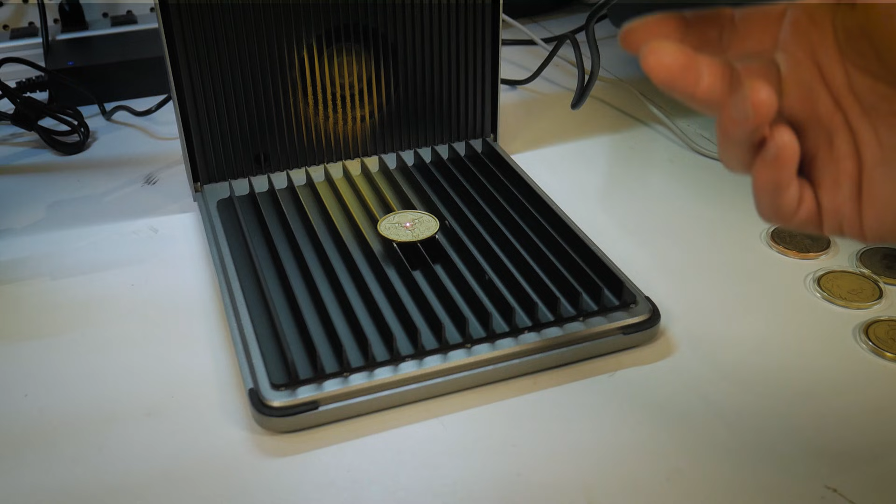Before we get right into the examples, I want to just briefly reference a problem that you may have noticed in the previous video that I did with the xTool F1 Ultra with the deep embossing of brass coins. The coins themselves looked amazing and there were no issues with the performance of this machine, but I want to just draw your attention to one of the inherent issues with deep embossing of brass coins, and that is the byproduct of very fine metal dust.

This metal dust will collect pretty much everywhere. Obviously, it's going to get sucked into the exhaust fan, and anything that doesn't go through your exhaust system that goes airborne could settle on all of your work surfaces, or even worse, inside of your lungs. During and after the making of that video, I prototyped a few different solutions for at least addressing the issue of the brass dust clogging the exhaust fan at the back of the F1 Ultra. But I didn't have a whole lot of success with this approach.

Ultimately, some of the brass dust still made it past the filter, and the stuff that was captured by the filter clogged those small pre-filters almost immediately. And those small pre-filters also didn't address the issue of dust escaping elsewhere into the room or even settling on the lens. And if you've ever done brass coin embossing on an xTool machine or any other machine for that matter, and all of those fine brass dust particles are getting sucked into your fume filtration system, you'll know that even with a very large pre-filter like the one on this filtration system, it will very quickly get fouled. This result here is from a single brass coin.

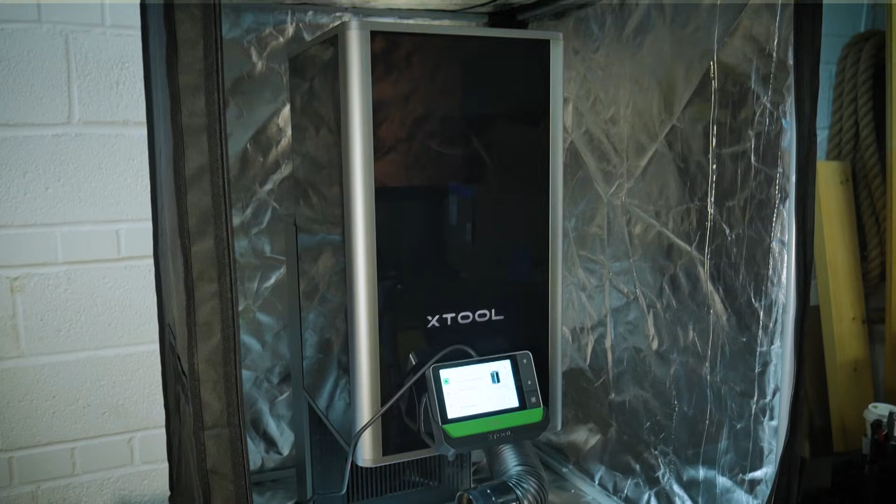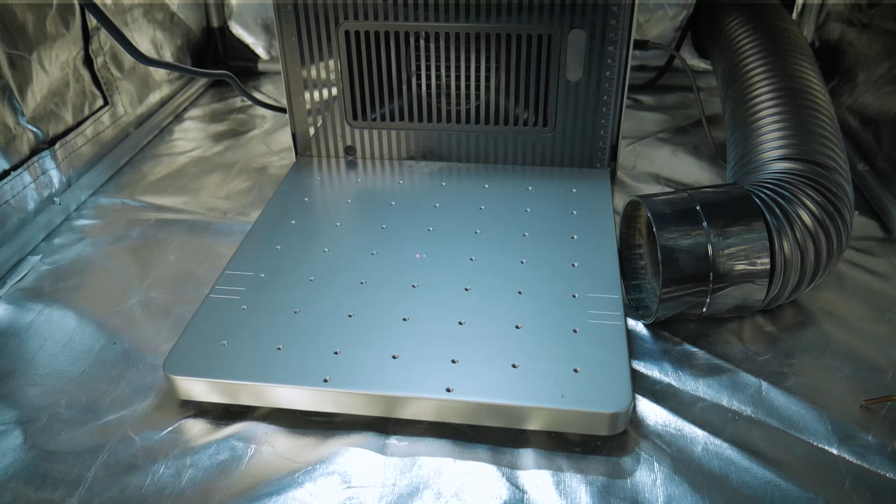So in this video, I do have some new solutions as well as some new suggestions on how to address some of these things. For example, with the F1 Ultra at that time, to get rid of the dust that's escaping the machine and settling on work surfaces, I put the entire F1 Ultra and now the F2 Ultra inside of one of these 3D printing tents. I'll link to this tent in the video description down below, but both of these machines fit nicely inside. You can zip the front cover shut, and there's also a hole at the back where you can route your exhaust hose. And now there's more of a slightly enclosed area for brass dust to settle.

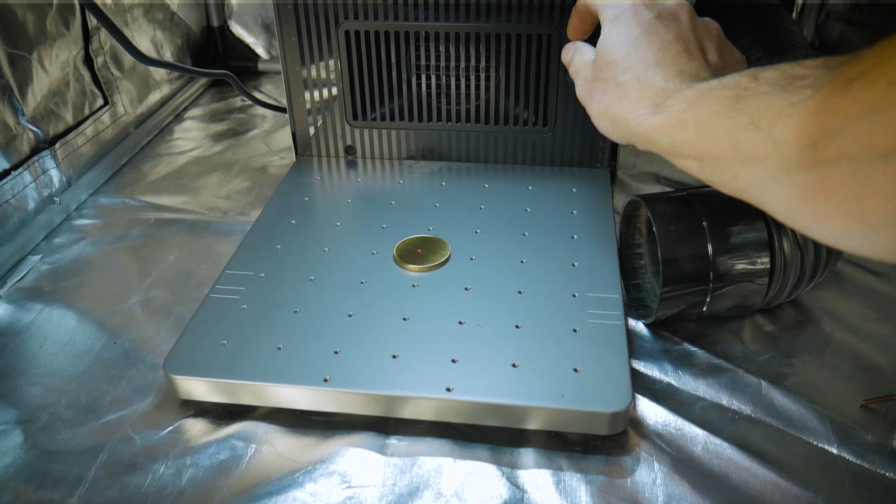And now with the F2 Ultra, you can see with the exhaust fan at the back, if I were to process this coin, we would obviously have the same problem as with the F1 Ultra. And to make matters worse, some of the accessory ports are now right at the back near the fan. Now there is this cover, and the F2 Ultra fan can be removed and can be washed, but ultimately I still think that if we can avoid getting brass dust caught up in all of this stuff, it's the best case scenario.

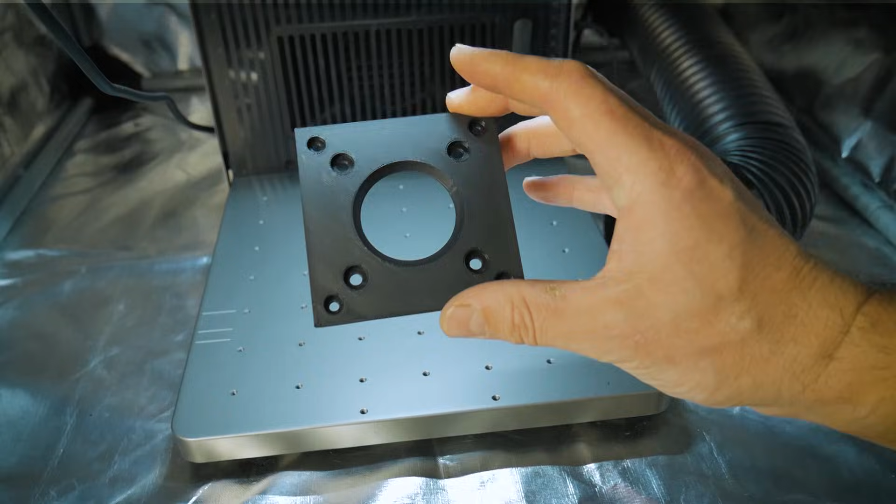And so what I've seen people do with open frame MOPA lasers is to just put an exhaust pipe beside the coin, and it will suck up at least some of the brass dust. This approach would bypass the dust getting sucked into the exhaust fan at the back and perhaps ruining those bearings, or at least having you take the machine apart and clean it. And this gave me an idea to come up with a system where we could more efficiently capture and control all of that brass dust right at the source.

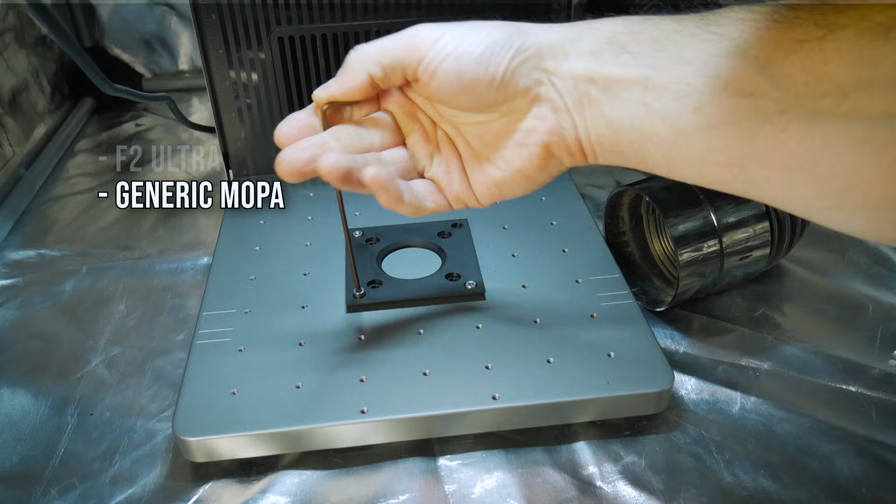So first, it starts with this fixture, and you can see right in the middle there's a hole. It's sized perfectly for a 40mm brass challenge coin. The fixture attaches to the F1 F2 Ultra base plate using some M4x10 socket head cap screws, and there are additional M5 holes if you wanted to use this on a generic MOPA laser, where I believe most of them have a hole spacing on the base plate with M5 threaded holes that are 25mm apart on center.

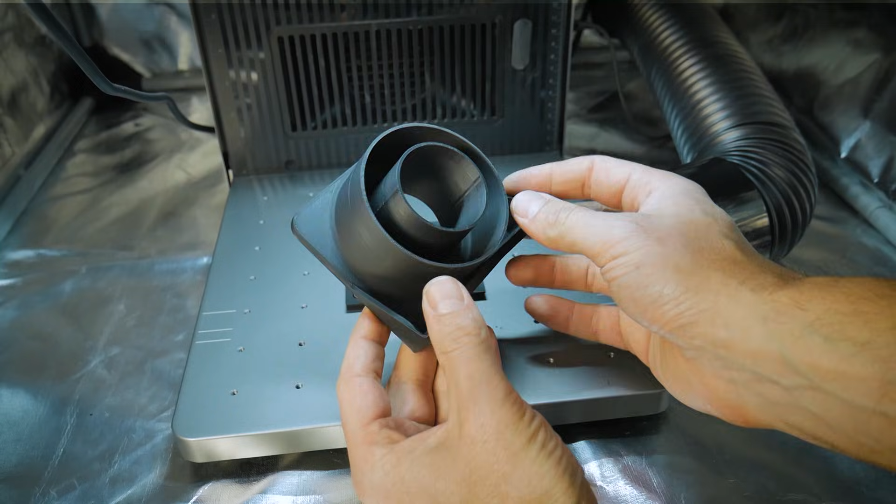So it's compatible with both. Now to the side of the fixture, we're going to have this exhaust port, and you can see there are two sizes. The larger of the two sizes will fit the black xTool exhaust hose, and it will just press fit on there. And there's a smaller port size that will fit a generic flexible 2-inch hose, and we'll talk about that a little bit more later.

This part also has a pair of mounting holes that use the exact same M4x10 socket head cap screws that work with the F1 and F2 Ultra base plates. Now for those, you will need one of these Allen keys with a ball end.

Now just like the fixture, there are 2 additional holes on this same piece that again would line up perfectly with a generic MOPA fiber laser base plate with those 25mm on-center M5 threaded holes. So the intent behind this kit is that it would be compatible with the F1, F2 Ultra, as well as a generic MOPA fiber laser.

So now once we've got this piece installed, I can take the black xTool exhaust hose and I can press it over top of that exhaust port. Then I can take my brass coin and I can place it in the fixture. Now to capture all of the brass dust, there is going to be this box that slips over top of everything. And I'm showing you the final 3D model right here, because in this video, you're going to see several different revisions of it, starting with one of the earliest revisions. And as the video goes on, we'll work through some of the natural design progressions of that box.

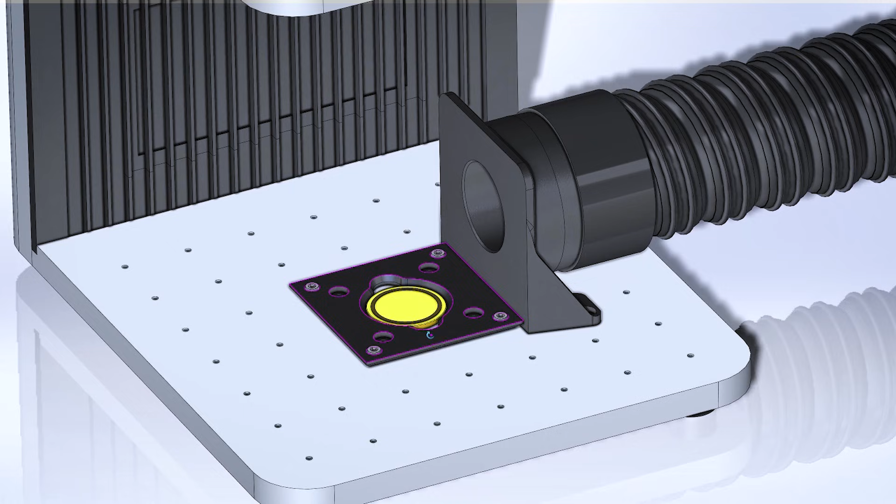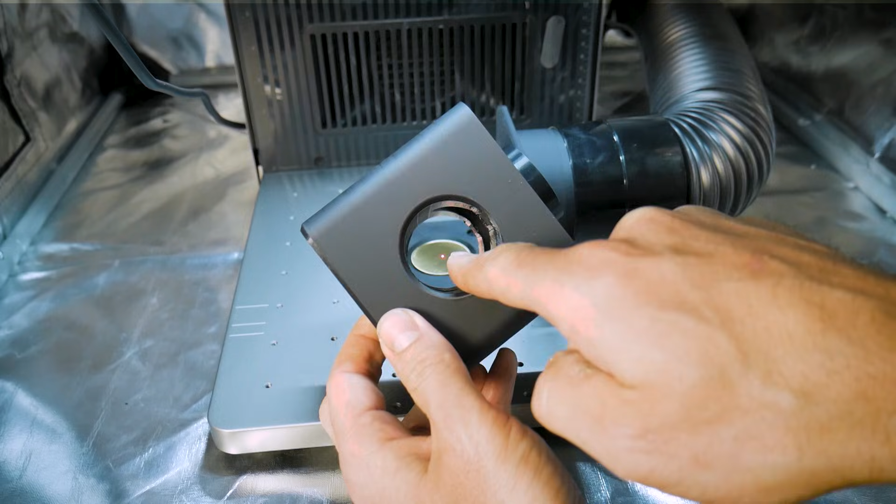But essentially it goes over top of the brass coin, and it allows the laser to pass through and obviously still process the coin, but will not or should not allow any of the brass dust to escape. All of it should go through that exhaust port, and this should solve many of our problems. So none of the brass dust should escape this system and collect at the rear exhaust fan or on the lens of our machine, and hopefully none of it should also go airborne. So we'll start there, and as the video goes on, we'll also address some of the other issues, such as the clogging of the pre-filters that I showed you a moment ago.

So right now we're going to go into xTool Creative Space and set up our first job with the F2 Ultra. I have embossment selected in the processing type, and then I've gone ahead and focused the laser on the top surface of the 40mm brass coin. Now I've imported my first graphic, and with embossments, you are going to need to use a depth map.

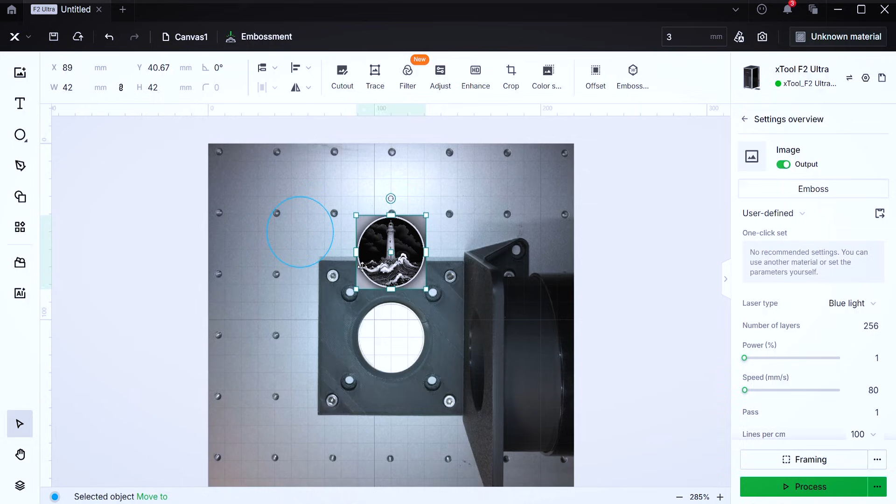Now, this is outside of the scope of this video. I did cover this in depth, no pun intended, in my xTool F1 video. So if you guys want to learn about that, please check out my F1 Ultra embossing video. It will teach you what a depth map is, how to generate them with various methods, and even how to modify them. So I'll put links to that in the video description down below.

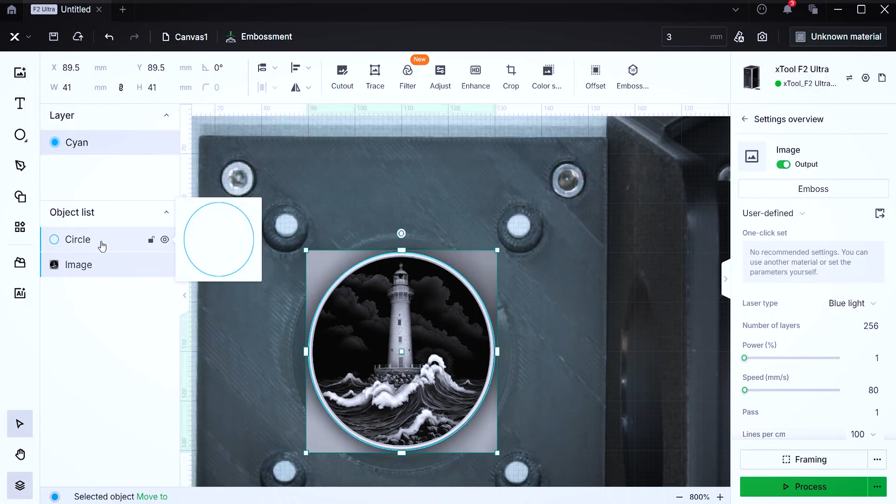And so while I was talking about that, essentially all I've done right now in xTool Creative Space is resize the depth map graphic to something around 40mm. I've created a vector circle, which is 40mm, and now I'm overlaying the two, and I'm adjusting the size of the graphic to fit inside of that circle such that I can use the vector circle and I can select the image together in the object list, right click, and then create mask. And what that's going to do is use the circle to crop out everything outside of the circle. So all I'm left with is this perfect circular graphic to fit inside of the 40mm coin.

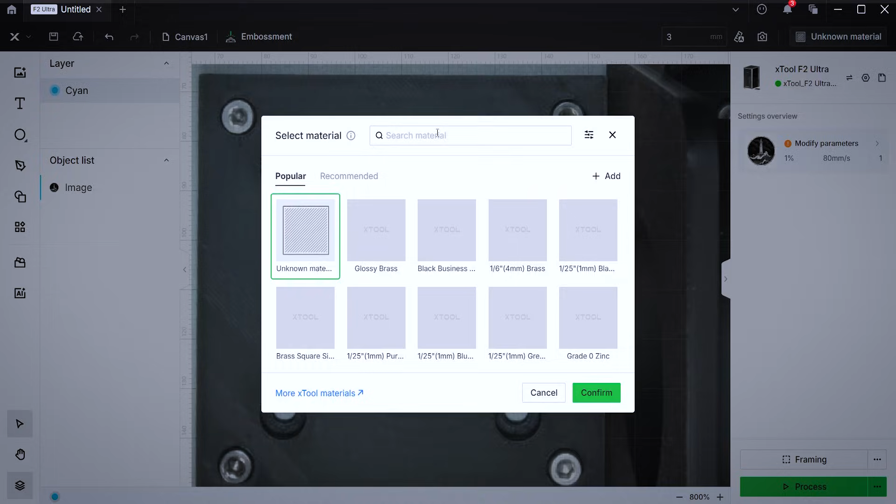Now in xTool Creative Space, we have to set the material type. So I'm clicking in the top right hand corner, and I'm going to go to more xTool materials, and inside of their now what's called Atomm library, we can go ahead and search for a material type such as metal and narrow it down by a search term like brass, or we can just scroll through the whole thing and eventually find the 40mm brass challenge coin settings. They do have other presets in there for other types of brass, but when you're doing embossing, you really want to look for these blank commemorative coins, and then you'll see here that it already has the F2 Ultra selected.

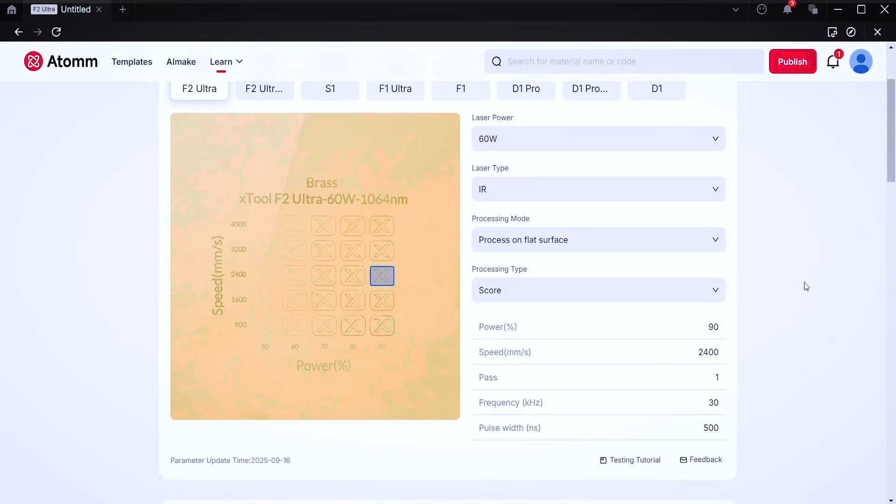The laser type is the IR laser, and if you click on embossment, it's going to give you all of the presets, but you don't have to remember any of those. You can just add those to xTool Creative Space, but then you still have to click back up in the top because now it's in your favorites list, and then you can just select that. However, what that will do is reset the thickness. So you can see that it's gone back from 4mm to 3mm.

So I'm going to use the buttons on the front of the F2 Ultra to refocus the lens onto the top of the surface. And by refocusing the laser, it's triggered another screen capture. But you can see when I select the graphic, it already knows that I want to do the embossing. So all of the preset settings have come up. And if you click on the advanced, there is an option to also do a cleanup pass. And for this first example, I'm just going to leave that off, and I'm not going to touch any of these settings. We'll use all of the presets directly from xTool.

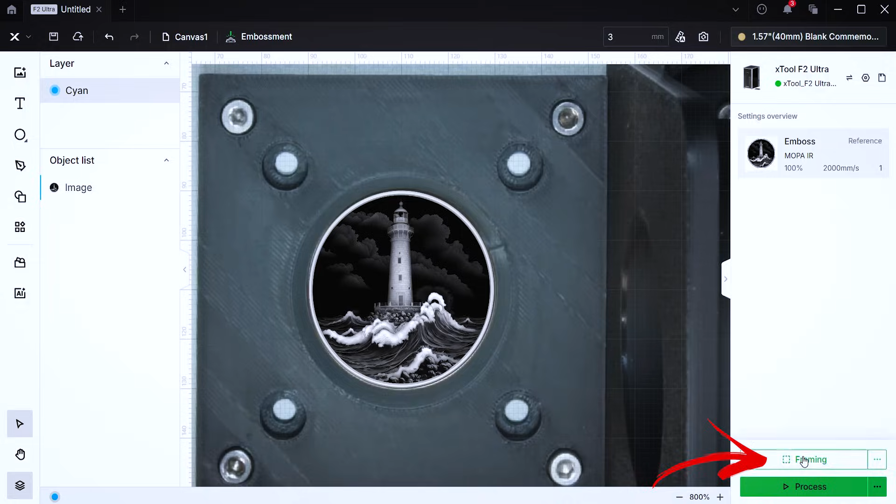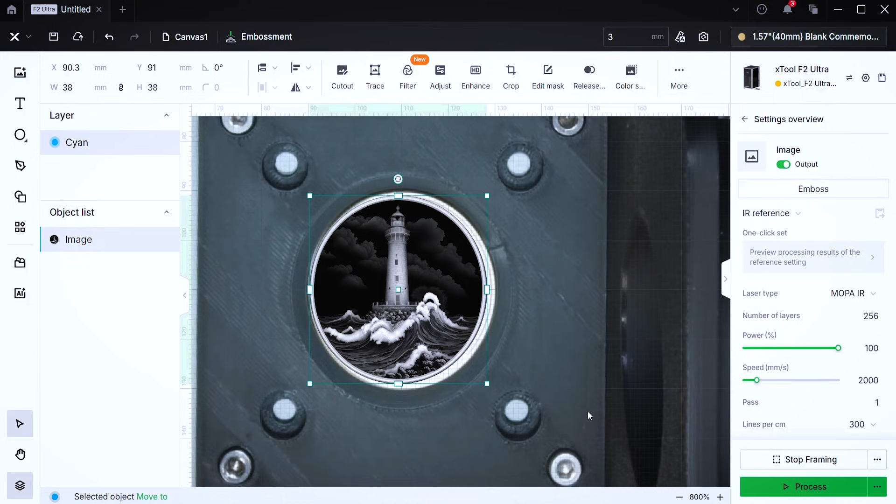Now, even though our graphic is perfectly centered and it looks like it lines up very nicely with the screen snapshot, what we want to do is frame our graphic. And we're going to use the outline style framing. We'll get a nice circle. And back in xTool Creative Space, if the outline for your framing isn't lining up right on center with your coin, you can just select that graphic and you can move it around using the arrow keys on your keyboard. You can do this while the framing is going on, and that will dynamically change the location of that blue laser framing that you see on the coin. And when you're happy with the final position, then you can just click on Stop Framing.

At which point you're now ready to just click on the green processing button, and you'll see a preview with a time estimate in the bottom left-hand corner. So for this graphic, we're looking at an hour and a half. I have my exhaust hose with that dust box hooked up to the older style xTool smoke and fume purifier. And the reason that I'm using the older one instead of the AP2, which I also own, is that I don't have anything set up right now for pre-filtration.

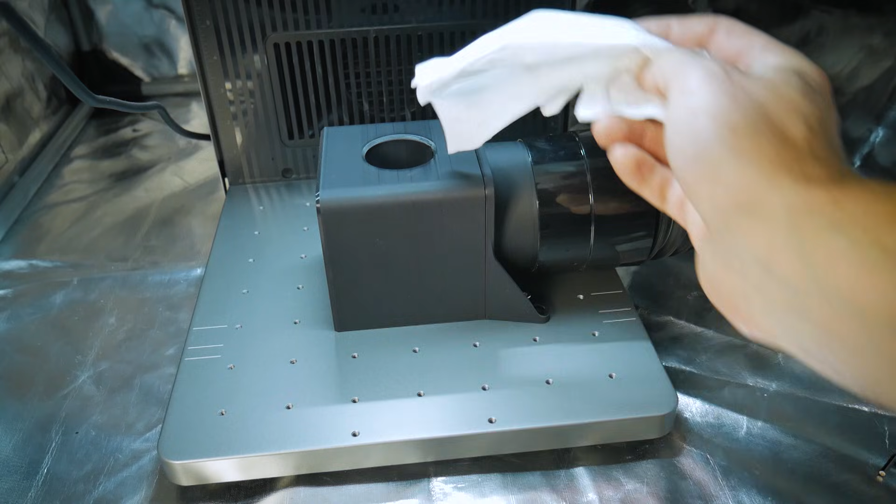I've cranked that fan up to the max setting, and you can see through the side hole and the top hole of the dust box that I've got a great amount of suction. Even if I were to slowly pull the box away a few millimeters, the suction is enough to pull it back in place. So with the box properly seated, we can now press the green button on the controller to start the embossing process.

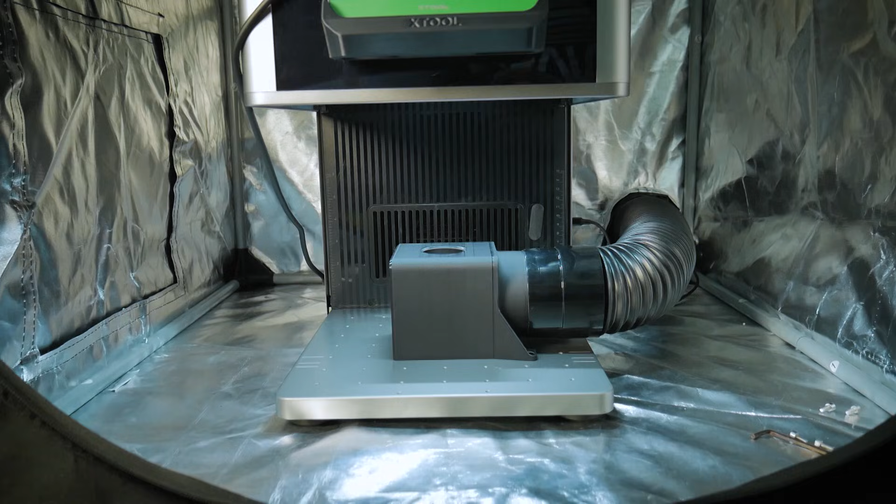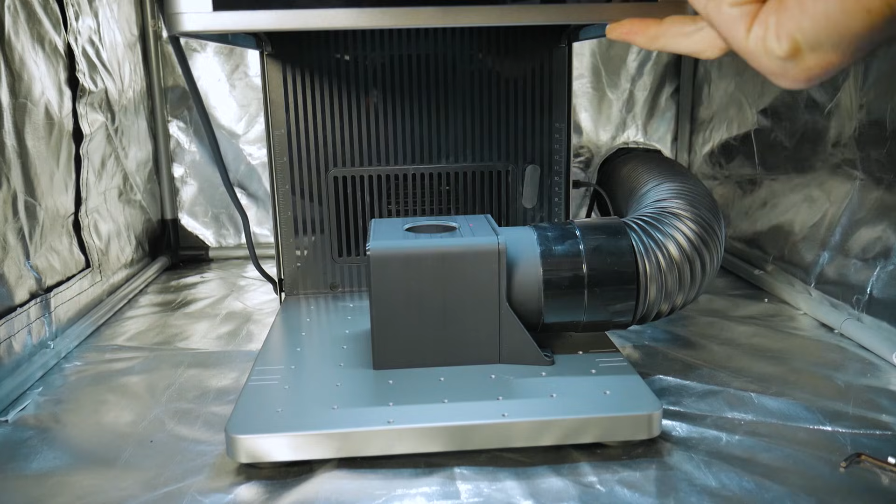Now, one thing you may also notice here is that the lid will not be able to fully shut as the hose is sticking out the side, so we can lower it most of the way down. The laser will be passing through that hole in the top of the box, striking the coin and processing it. Any reflections should not be able to come out and hit you in the eyes. You can also close the cover on the tent if you have one. But of course, without your lid fully shut, you should exercise the absolute maximum caution and make sure that you or anyone else in the room is wearing laser safety glasses.

Now, unfortunately, this dust box doesn't make for very exciting video footage because everything is happening inside of that opaque box and I can't film through it. And you'll see here that all of the dust was successfully contained. However, not all of it actually got sucked through the exhaust hose. Some of it was settled on top of the fixture. But the good news is that it did its primary job of protecting the fan at the back.

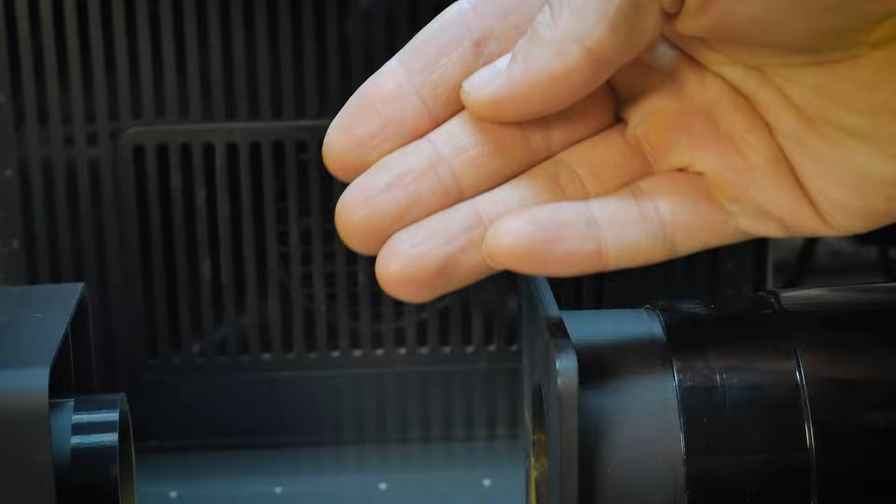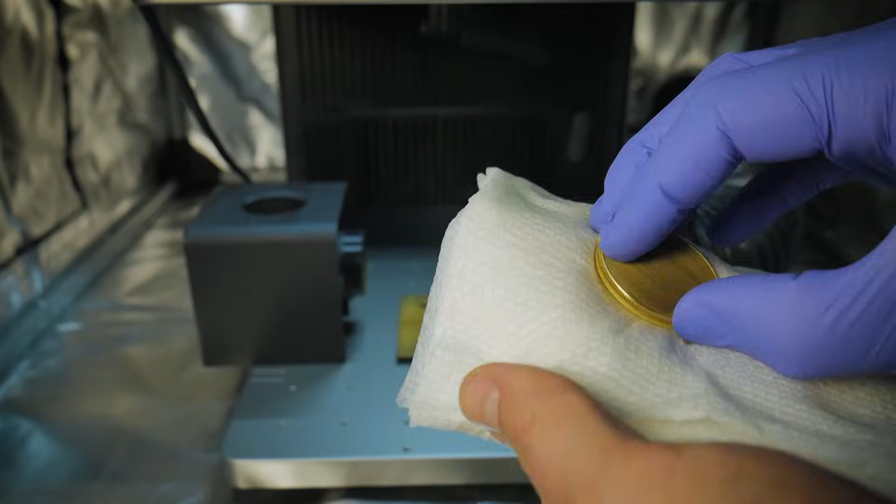Nothing seemed to escape that box, and considering the fan at the back just automatically comes on, it's still creating some amount of suction. So logically, if anything did escape, you'd think that some of it would settle on that fan grill, and nothing appears to be sticking to that. So that's a great sign. Now, removing the coin, the embossing looks very good. This particular coin here was one of the sample materials that came with my F2 Ultra. So this is an xTool Select material, and it appears to be of very good quality and solid brass. And that's very important.

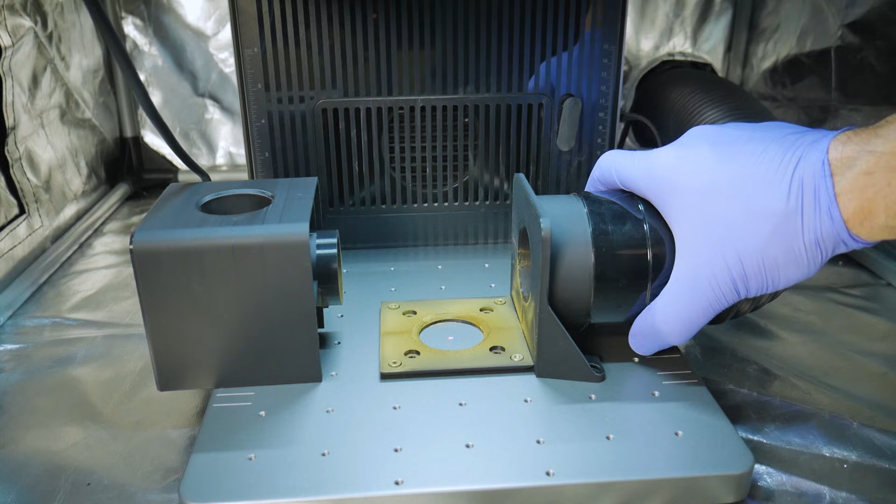In the F1 Ultra video that I told you guys you should go watch, you'll see in that video, and we'll touch on this a little bit later, that there are materials out there, cheap ones that you can buy from Amazon or AliExpress, that may not be pure solid brass. And those plated coins might contain steel or other materials that you will not be able to effectively work with, so you're going to want to avoid those.

Now, removing that exhaust hose, you can see inside that it is absolutely lined with brass, and that was a pretty new hose that I had not previously run any brass coins with. So you can imagine down at the filtration end what it's going to look like. Removing the cover to access the filter of the older style xTool purifier, the result is more or less what I had expected, and the pre-filter is completely blocked.

And during that embossing process, I noticed that this did have a negative impact on the amount of suction that the filtration system could produce. And it turns out that's mostly why when I had removed the dust box from over the coin, you saw a lot of brass material still left over. So I went ahead and cleaned the pre-filter just by vacuuming it with a shop vac. And then I'm going to reset our workspace here and just take a damp cloth and remove a lot of this brass dust from on top of the fixture.

And so even in this case where the filtration system was partially blocked and the suction was partially lost, and then we had some brass dust in there, because it is all contained inside of the dust box, it makes things very easy and manageable to clean. At this point, I decided to move on to a different strategy in trying to capture that brass dust before it made its way to the filter system.

And if you guys are familiar with woodworking, you guys have probably seen these Cyclone dust collection systems. This one is a mini version. It has two ports, one at the top and one at the side. The sticker shows the one at the top will go to your vacuum source, and the port at the side will go to the output port of our brass dust box. I'm using some very generic 2-inch inner diameter flexible hose, and it attaches to the Cyclone dust collector as well as the brass dust collection system with hose clamps.

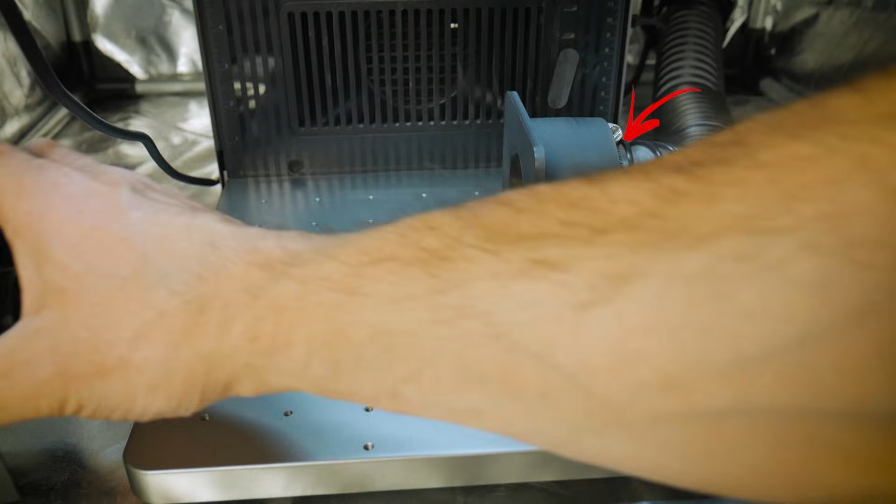I'm going to give this one a try and see how well it collects the brass dust and if it's going to protect our pre-filter from getting clogged up.

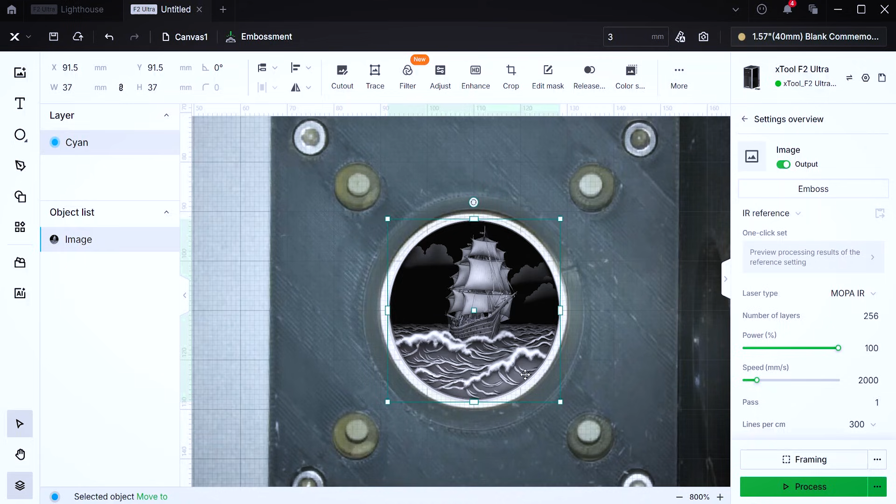Now I'm ready to emboss this design, and I'm going to use all of the standard xTool settings for the brass coins. However, I will enable the cleanup pass. Now we can press the green processing button and it will take us to the preview screen, where again we can find that this coin will also take an hour and a half. And I should mention that this is nearly twice as fast as what I had experienced previously with the xTool F1 Ultra. With the brass dust box in place, there's not much to see during this process, and we'll just get right to the point with the final result.

And again, a very nice looking coin. The F2 Ultra combined with these very nicely designed depth maps are producing very good results with some amazing details, and the depth of the embossing itself is quite deep.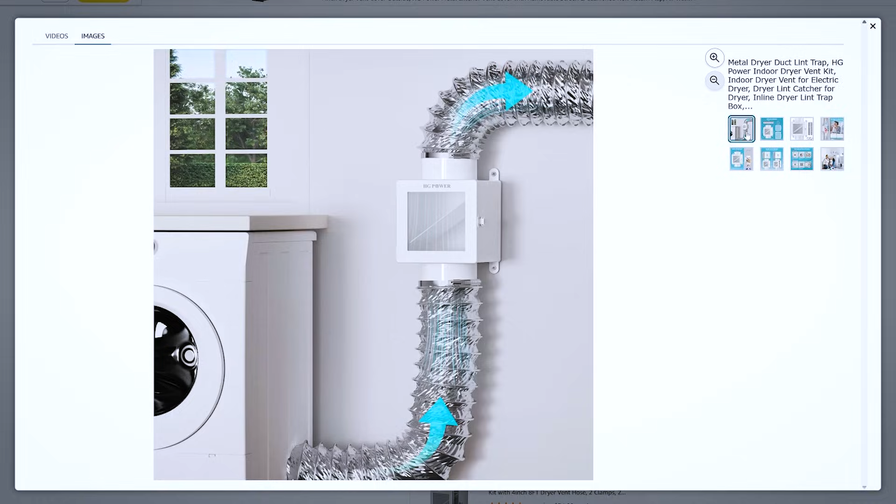However, it may be the case that you don't have this exact fume extractor, in which case you can look for some kind of inline filter solution, like a filter box or other inline filter component, where you can very easily swap in and out these paper towels. I'll put some links in the description to components I think will work, and by doing it this way, it won't matter what kind of vacuum source you have. You'll just need to splice this solution into the hose between your vacuum source and the dust box.

So we'll go ahead and try this with our next example, and for this I've got some new brass coins. These ones have a polished ring accent, and I found them on Amazon.

Back in xTool Creative Space, we're going to do a similar process where we take our depth map design and I'm going to crop some of it using a vector circle. Since these coins have a polished ring, and I want to retain that because I think it's going to look pretty cool, I'm going to crop off a little more than usual, and I'm going to shrink the whole design down so it fits inside of the polished ring.

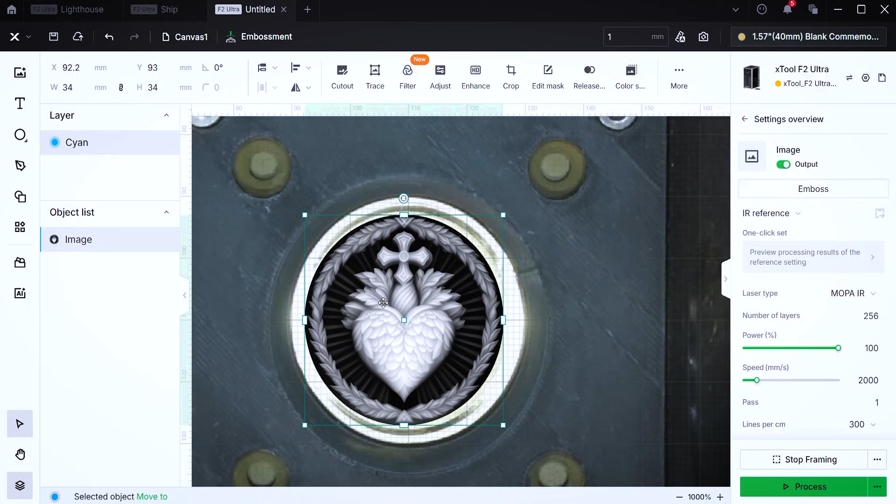To ensure it fits inside of that ring, I'll be using the framing feature. You're going to want to make sure that you've got your framing set to outline, so it will be a circle instead of a square. Once I've confirmed it's sized appropriately and positioned to fall directly within that polished ring, I'm going to go ahead and process it.

As always, I'll be using all of the default settings within xTool Creative Space for these 40mm commemorative coins. And just like all the other examples I've shown you, I'll slip that brass dust box on to prevent any of the brass dust from going all over the place.

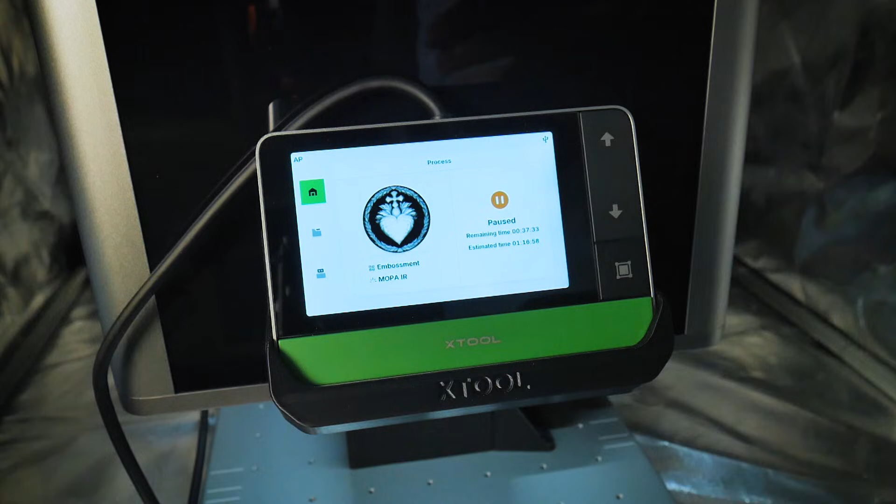But this time, halfway through the job, I'm going to pause it and change out those paper towel pre-filters I showed you earlier. This will ensure that during the entire 1 hour and 15-minute job, I have a nice amount of suction.

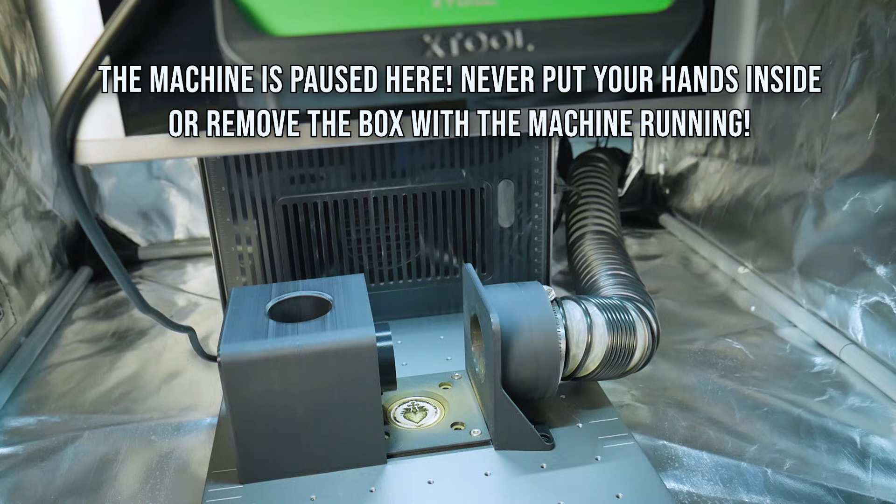While the machine is paused, I'm going to open up the dust box and take a quick peek inside to get a sense of whether there's a large amount of dust built up to this point. You can see this is a pretty good amount of time to change the paper towel pre-filters, and that will give us a good reference to compare to at the end of the job, which will take about another 40 minutes.

Moving over to the smoke and fume extractor, you can see that the single layer of paper towel pre-filter has been completely used up. So if you guys are going to use this paper towel pre-filtering trick, I would highly recommend that you change out your layer of paper towel around 30 to 40 minutes of processing time.

I'll quickly swap in a new fresh layer of paper towel and put the lid back on the smoke and fume extractor. The job can be resumed simply by clicking on the green button on the front of the controller of the F2 Ultra, and at the end of it, this here is the result. You can see it looks a little bit odd.

There are definitely some sections here of the coin that look underprocessed, and I thought that perhaps I had done something wrong in the settings. I went back and double checked those, and everything looked normal.

Next, I started to question whether or not pausing the job in the middle could be the culprit, but I'd actually done this in the past with other coins, and it had never been an issue for me. In that moment, I ended up just chalking it up as a one-off and figured I'd try to process some more coins.

But later on, after trying more of these coins, it seems like it was actually a material issue. In my F1 Ultra video, I had sourced some cheap coins off of Amazon that turned out to contain some amount of iron or steel, and it was obvious because they were magnetic.

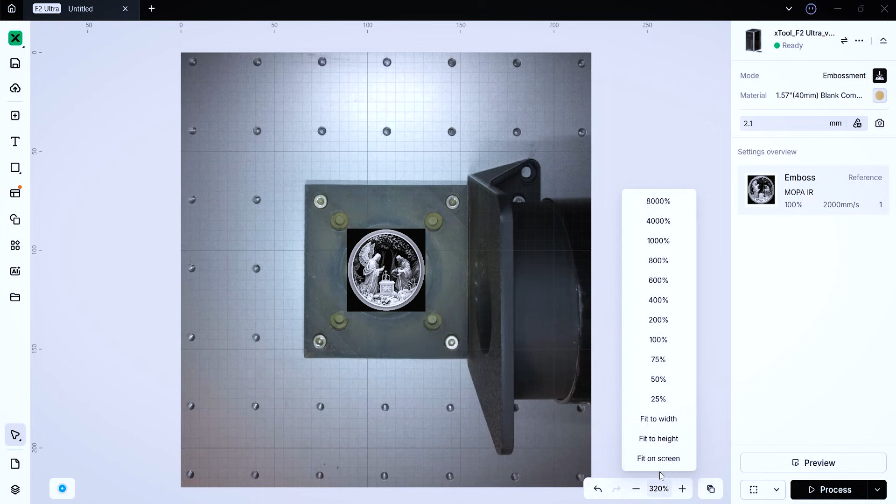On the right hand side you can see the focusing height, and we'll go ahead and use that along with the buttons on the front of the xTool F2 Ultra controller to set our focus to the top of the material and then get our screenshot.

Now with the graphics selected, we can click the edit button in the top right hand corner, and a bunch of editing tools will pop up on the left hand side. We can click on cutout, then I'll select manual cutout, and from there we can use the magic wand to erase the black background.

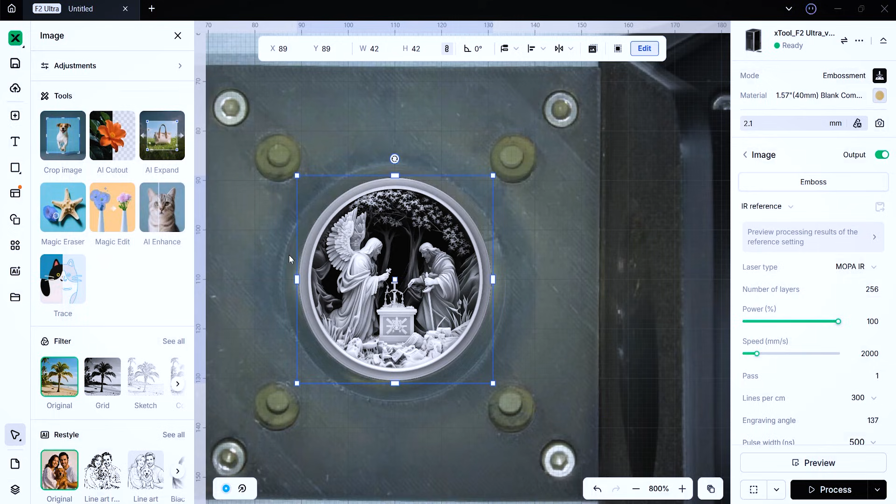Alternatively, we can still use the same method that we had done in the past by drawing a vector circle and then using that circle to crop some of the image. For this example, I'm going to be using both methods just to show you where to find these buttons inside of xTool Studio.

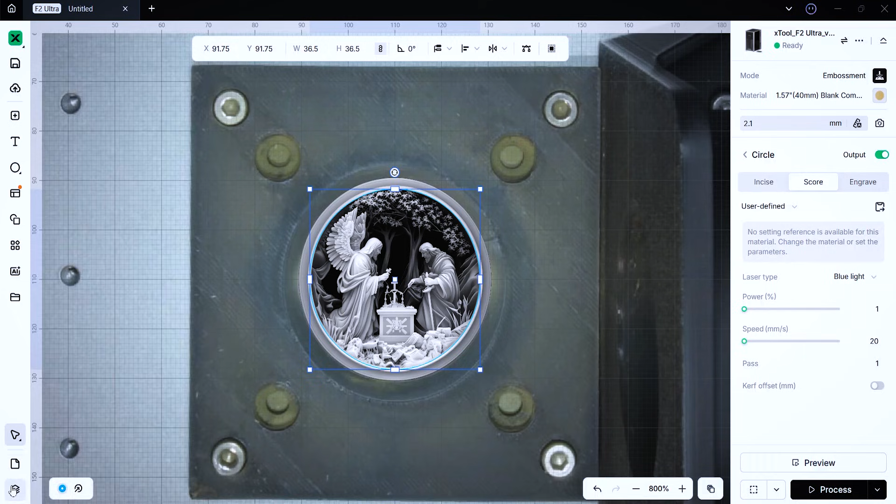So I used the cutout with the magic wand to remove the black background, and now you can see I've used the vector circle that I've drawn in, and I'm just going to resize it, and then I'm going to center it. I'm going to be using this vector circle to cut out the white rim around this entire image.

Just the same way we would have done it in xTool Creative Space, I've got the vector circle and the graphic selected, and in the object list, I'll right click on those both selected at the same time, and I'll create a mask.

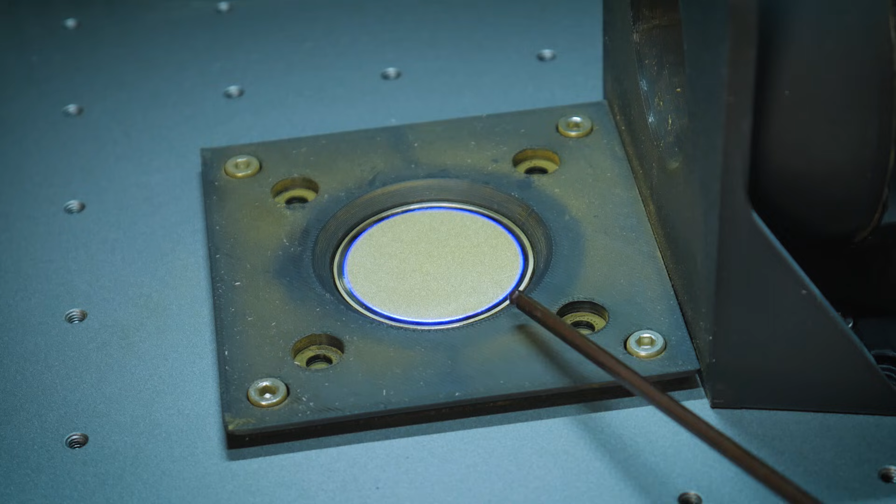That will remove everything outside of that circle, and then in the bottom right hand corner of the screen, you can see the framing button. It no longer says framing, it's just a dotted square, and I'll use that to frame my image inside of the coin. I'm going to do the same thing that I did in the previous example - frame this inside of the polished circular accent of these coins.

Also, a few examples back, I showed you the embossment preview inside of xTool Creative Space, and in xTool Studio, there's a preview button in the bottom right hand corner that's going to bring up the same sort of preview of the embossment.

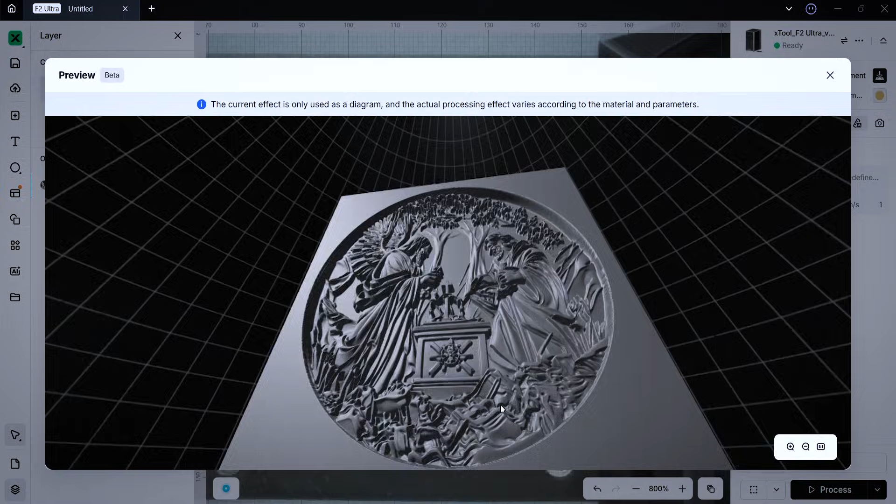We can use this preview to get a nice 3D representation of what the coin should look like in the end. You'll also notice that I have the material selected as the blank commemorative coins, and because I'm in embossing mode, that will already set the same presets as for embossing brass coins in xTool Creative Space.

So despite this being a whole new software package, it's still pulling the same presets from the same Atom library as xTool Creative Space does. Before we click the green button on the controller to start this job, I'm just showing you that within my smoke and fume extractor, I've removed the very large, thick, and fluffy pre-filter because I had run it too many times previously without any paper towel pre-filters, so it's completely fouled.

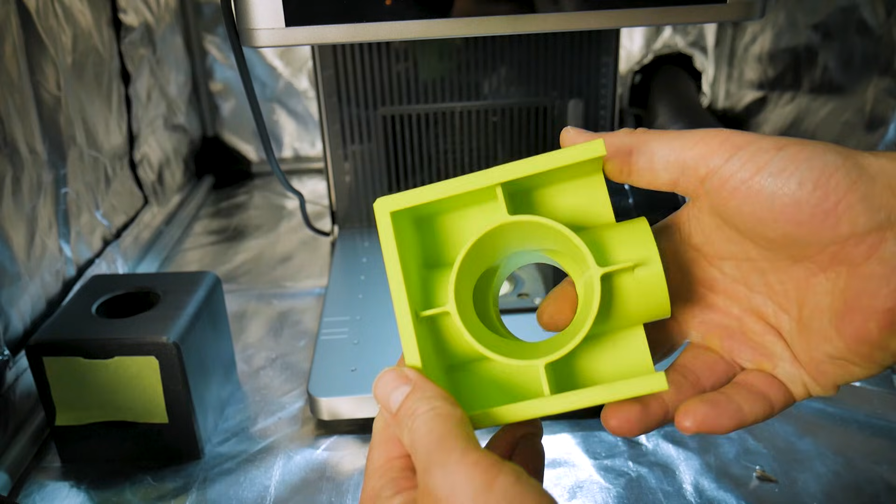What I did was just replace it with even more layers of paper towels, and that should protect my actual filter mediums perfectly fine. One of the other things I started playing around with was partially blocking off one of the inlets on the brass dust box. As I had anticipated, not everybody is going to have the same vacuum source that I have, so I redesigned the box with a valve or a shutter on the front. If your vacuum source isn't very powerful, you can slide it completely shut and then you only have the single opening in the top. Now with less surface area, even if you have a weaker vacuum source, you should still get a lot of suction. It just gives you the ability to tune the box a little bit.

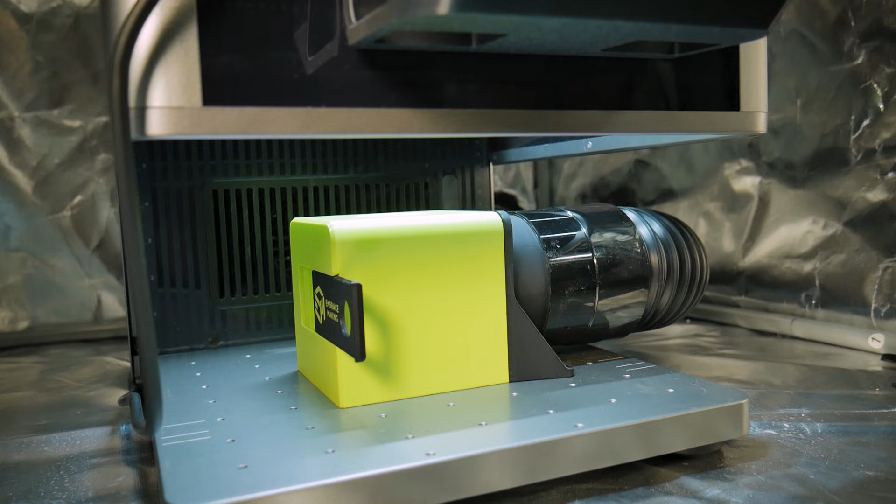You'll also notice that I changed the color of the box from black to green, and there is a purpose for this. It turns out that black is one of the most efficient colors at absorbing IR laser light. Therefore, anything that may have been bouncing off of the coin was likely getting absorbed by that black plastic, and it was definitely warming it up. By using the green or a lighter color plastic, this no longer seems to be an issue, and there's much less chance of that plastic warping.

In terms of the coin embossment, this one does look significantly better than that last example. It has some much darker sections, so it looks like the laser was able to penetrate deeper into this coin, despite it being the same material as the last one. Either that or the coating or plating on this coin was thinner, and it didn't result in sections that looked under-processed. So overall, I thought that was a pretty good result.

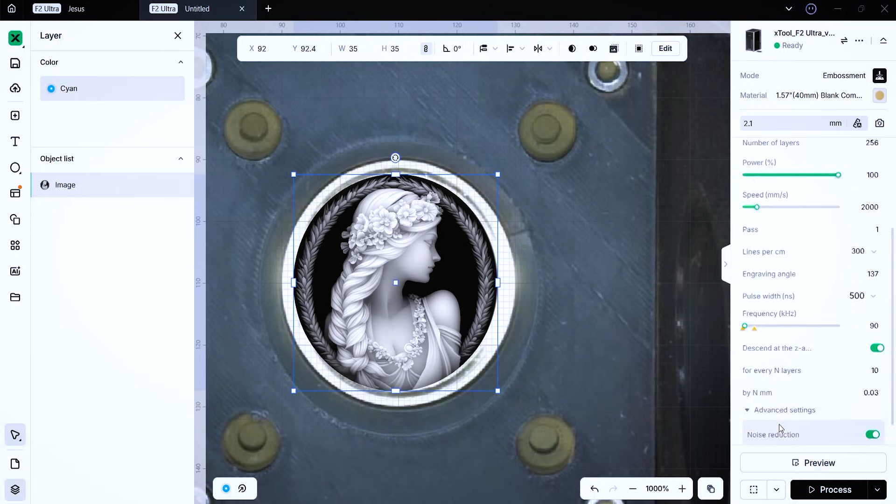Next, we can move on to yet another design, and now we're familiar with the workings of xTool Studio. I'm going to try not to repeat myself too much, as we already know I'm using all of these standard settings, and I'm just going to enable the noise reduction. I am, however, going to click on that preview button one more time, just because I really enjoy seeing what the software interprets the depth map to look like, and then comparing it at the end to what the actual result looks like.

Now, unfortunately, during this job, I did run into a problem I had never dealt with on this machine before - I happened to bump into the table while the job was running, and this actually canceled the job. There is some sort of detection with the F2 Ultra, where if the onboard gyroscope is disturbed, it's going to cancel the job. You can see the coin here was only partially processed. Now, if you're a bit of a clumsy person and you don't want a light nudge to your table canceling any of your jobs, you can go into the settings inside of xTool Studio and deselect the button that says stops when moved.

Now, up until this point, I've been using all of the standard settings inside of xTool Studio, but as I do in all of my videos, I eventually venture outside of some of those settings or run some experiments to try and get some more interesting features and improve the final result. So right here, I'm going to show you guys how to do a nice cleanup pass on these coins to brighten them up. For this, you can see that I've got a round vector circle drawn.

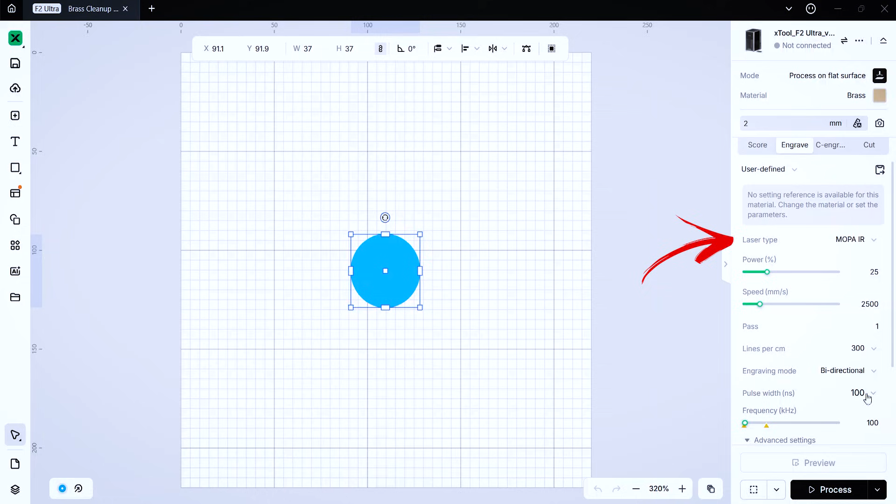I've selected engrave. We're in the process on flat surface mode, and we're going to be using the IR fiber laser. I've got the power set to 25%, but I'd say anything between 25 and 35% should work. Speed is set to 2500 millimeters per second. We've got 300 lines per centimeter, bidirectional engraving mode. The pulse width is set to 100 nanoseconds.

And in the advanced settings, I would encourage you to play with the crosshatch button on or off and see what works best for you and your designs. The cleanup pass doesn't result in any meaningful amount of dust, so I'm going to run this over one of the previous designs with the dust box off, and you can see immediately the difference that it makes. It brightens that coin right back up.

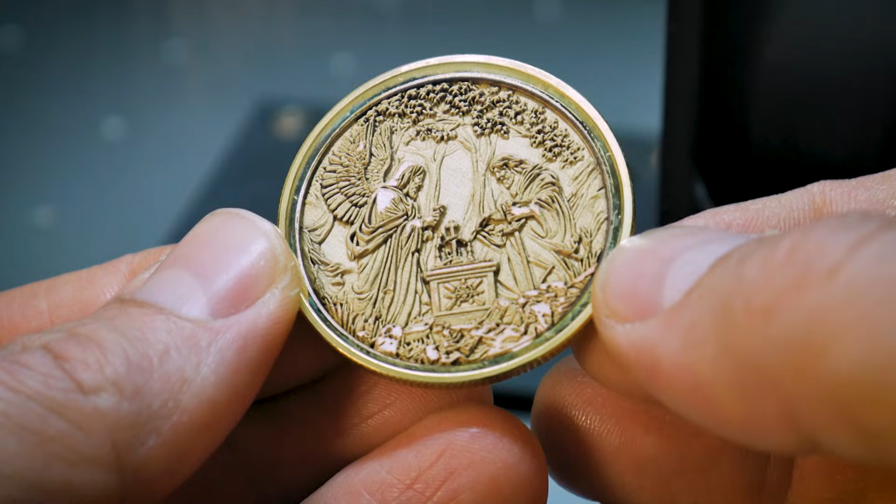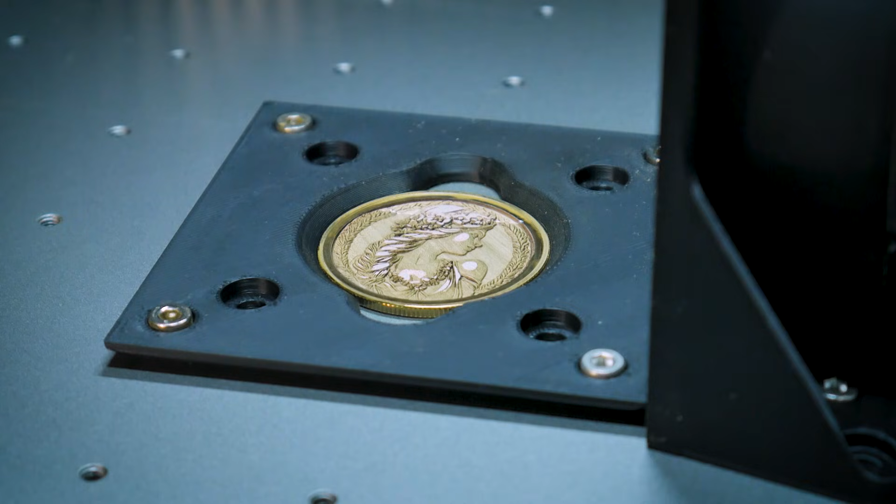Depending on the design or perhaps your personal preference or your client's preference, you may or may not want to go for this brighter look. Personally, I like it in a lot of circumstances. However, one of the things that it will do is it makes the coin look very uniform, and you may lose some contrast in some areas of your design. But luckily, I have a solution for that too, which we'll take a look at in a moment.

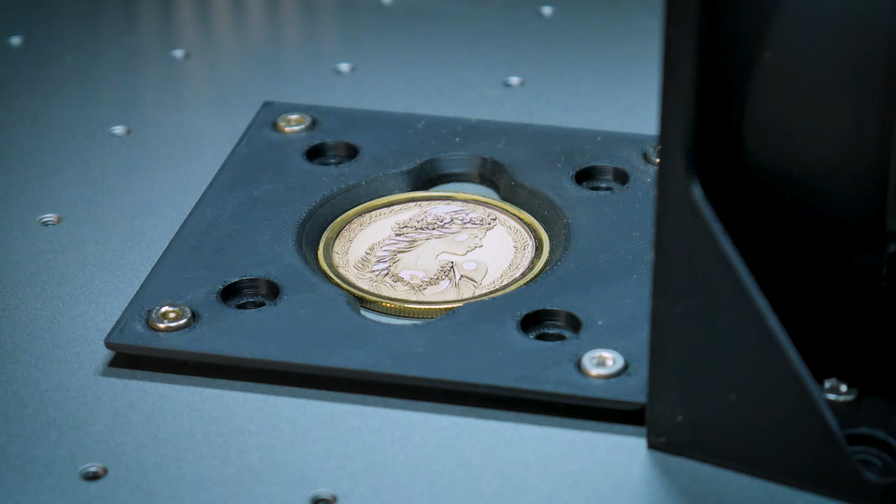But looking at another one of the previous examples with the cleanup pass now performed, you can see it does a very nice job of removing any areas where you may have seen some lines from the embossing. So yeah, it does exactly what it sounds like, and it cleans up your coin. But let's move on to the next example where I think that we can combine some of these different approaches and get a very nice looking design with high contrast. So I've got this graphic of the Medusa.

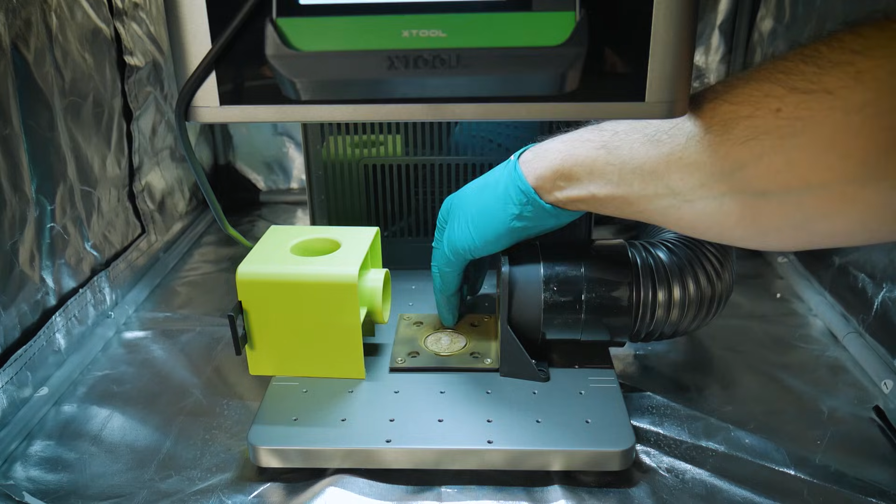But unfortunately, again, I ran into an issue with the material. However, this was the last time that I had to deal with this problem, because a day later, I went back on Amazon and found a different source for these brass coins. In the past, I had some luck with some brass coins on Amazon that didn't have that polished ring, and I was able to find those ones again.

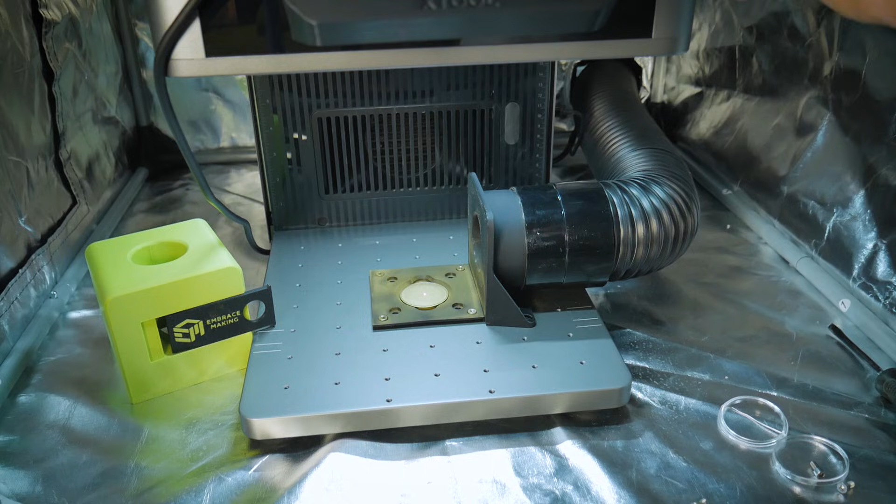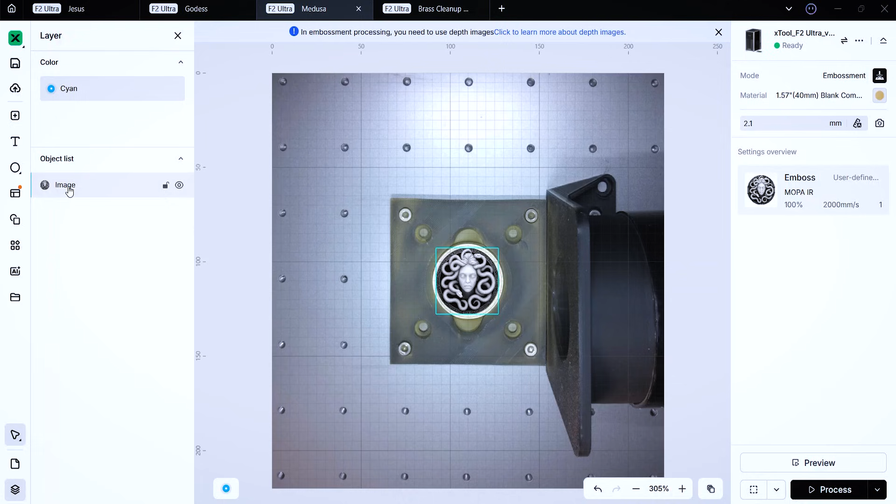So once I reprocessed this design on the new coins, you can see that there was absolutely nothing wrong with them. Then I threw a cleanup pass on top, and that's going to lay the groundwork for this next step where we're going to add back some contrast. Now, it's very important during this process that you do not remove or move that coin whatsoever. Leave it in the fixture.

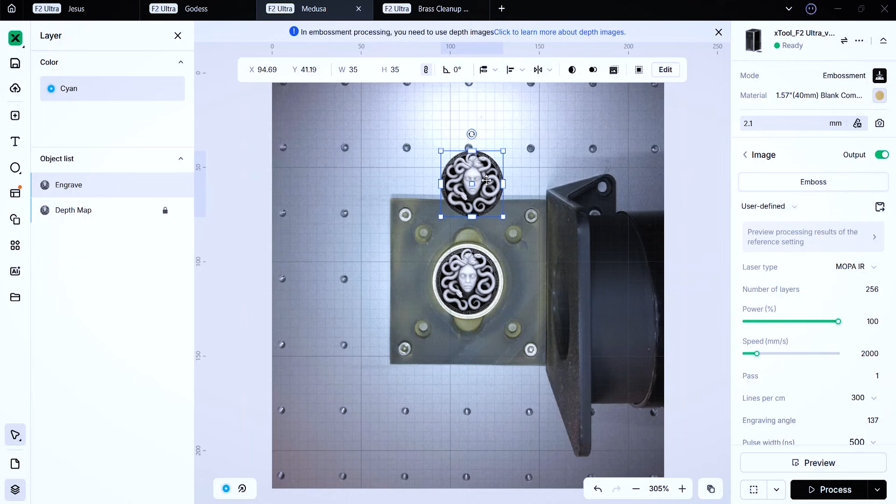Now, back in xTool Studio, you can see that I've taken the original depth map and I've just renamed that layer to depth map. Now I've copied and pasted it. I'm going to lock the original depth map layer, and I will disable its output. Now the copied layer, I'm going to rename just to simply engrave, and we're going to select that image, and we're going to be doing some very minor image processing or editing inside of xTool Studio.

So I've zoomed in on the image, I've got it selected, and I'm just going to click on the edit button in the top right hand corner. And up at the very top, you'll see a little flyout menu that says adjustments. So we'll go ahead and click on that. Now in here, we can adjust things like sharpness, saturation, brightness, contrast, temperature, and tint. What we're going to try and do is play around with just a few of these.

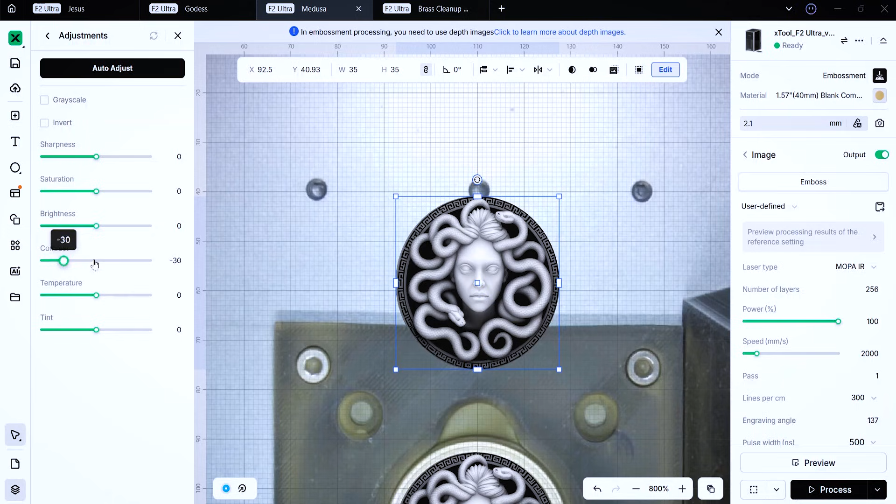So for example, contrast, and by increasing the contrast, you can see how the dark colors get darker, so the blacks get blacker and the whites get whiter, and anything in between kind of goes towards one or the other. By increasing the brightness, the whole image gets a lot brighter, and we lose a lot of the gray colors as they tend to shift towards the white. And what I'm shooting for here is to actually get rid of a lot of those grayer colors and a lot of those details, make it a lot more just black and white.

And one simpler way to do this is just to click on the grayscale checkbox, and now we've got a slider with two ends. So if I bring down the slider on the right hand side of the grayscale bar, you can see that it starts clipping some of the lighter colors like the lighter grays, and we're just left with the blackest of blacks.

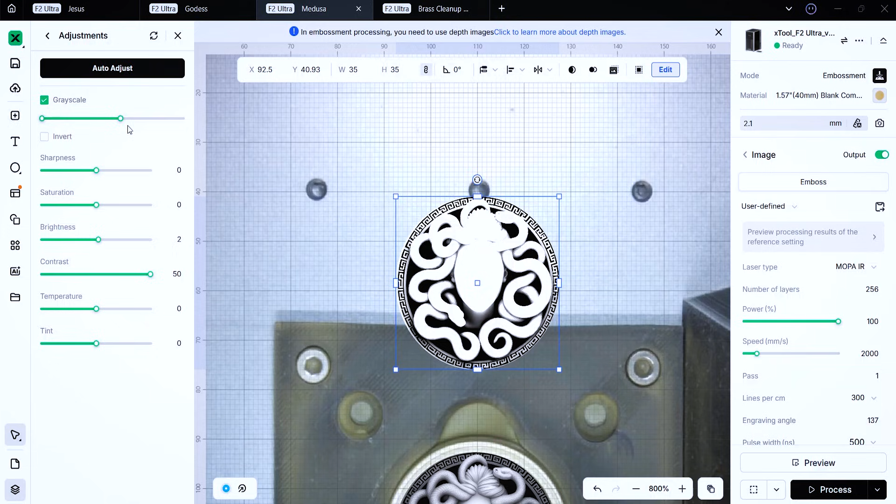And conversely, if I grab the left end of the slider and slide it towards the right, it will do the opposite. And since we're going to try and bring back some of the darker areas of the coin, we really only want to play with the right hand portion of that slider and just slide it in maybe about a third of the way to the left. And what we're left with is a very high contrast black and white image with the darkest black shades retained.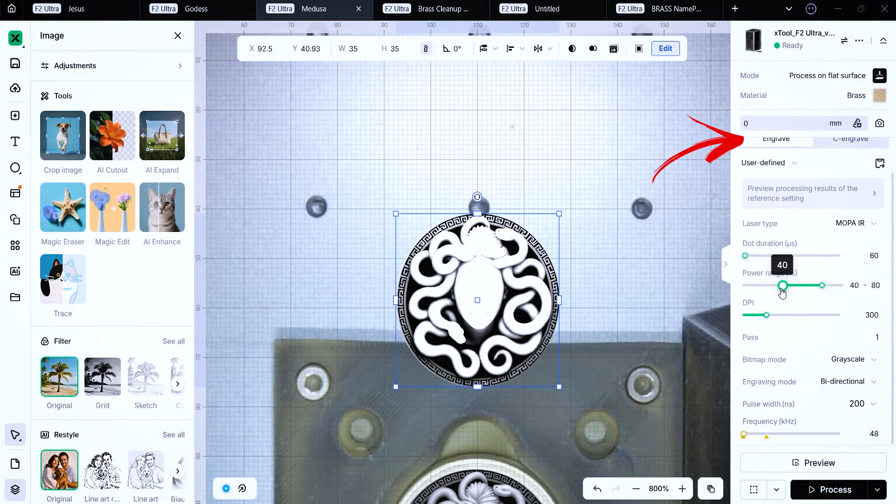Now we get into the process settings for this new image, and you can see that we are in the process on flat surface mode. This is key. I've got the material set to brass, and I've got the engrave button selected. And this is a raster image, not a vector, so it's absolutely key that we have the bitmap mode set to grayscale. Now I'm going to adjust the power range anywhere between 40 and 80%, and you can play around with that a little bit.

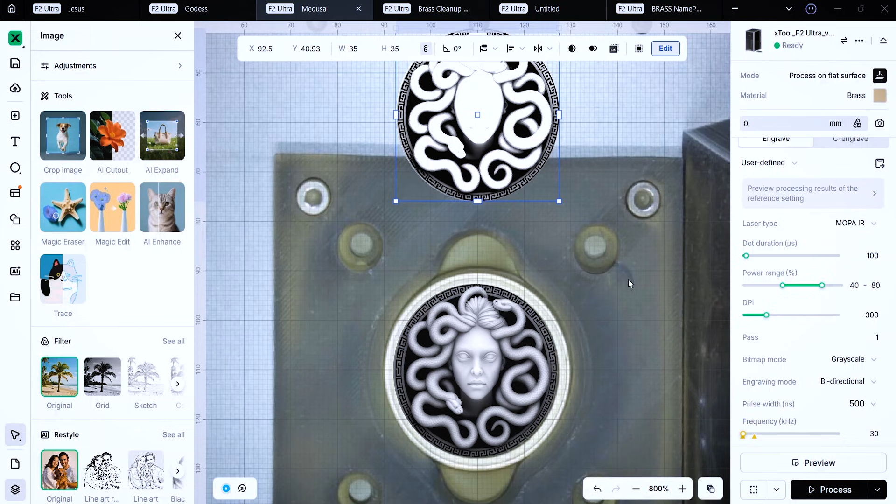The pulse width is set to 500 nanoseconds, and I'm going to go back and adjust the dot duration. This is also something that you can play around with a little bit. I'm going to set it to 100 microseconds, but if you're looking for a darker engrave, then you may want to go up to about 140. Then at the bottom, the final setting was the frequency, and that's at 30 kilohertz.

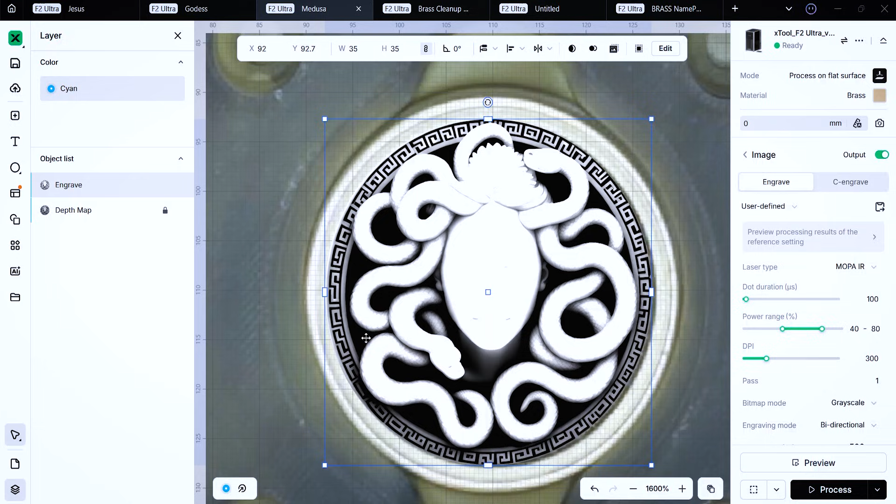Now we can take our graphic and we need to overlay it perfectly with the original depth map. You can drag it directly on top and try and use the snap feature to do that, or you can click on the original image, grab its coordinates, and copy and paste those over to the new image to ensure that they are perfectly aligned. Just be sure to double check that the original depth map image has its output disabled before you go ahead and process this job.

Also, during the process, if you happen to switch materials like I did from the commemorative coin to brass, then you'll also want to ensure that your focus is properly set to the top of the coin. After that, we're ready to hit the process button and bring back some of the contrast to the coin that we lost during the cleanup process.

Now in this first example, you're going to see that some of the blackness does come back to the coin, but this is just with a single pass. Now you could take the approach of trying to increase the power or increase the dot duration and try and get that blackness back with a single pass, but actually I prefer to do this with multiple passes as I find it gives a much more uniform result. So in this one here, you can see that some of the darker areas were made darker and the coin looks a little more dynamic, especially in that outside geometric pattern.

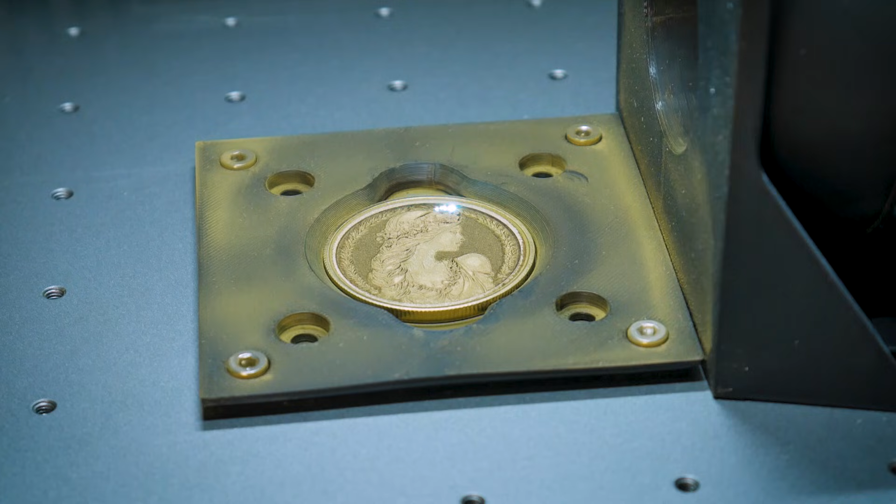But I think if we go back to another one of the previous examples and we run, let's say 3 to 4 passes on this one, you'll find that the darker colors become even more prominent, especially in the larger and flatter areas. And this is going to bring out the character in the front of the coin. And although it is an embossing and already does have depth to it, the darker background is going to add the illusion of even more depth. And of course, it's going to also increase the contrast of your graphic, and it's going to draw the attention more to the focal point of the character in the center.

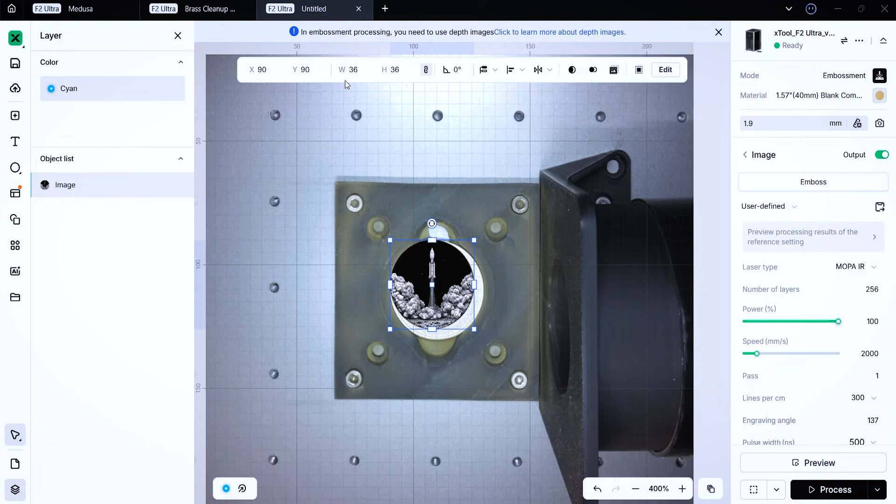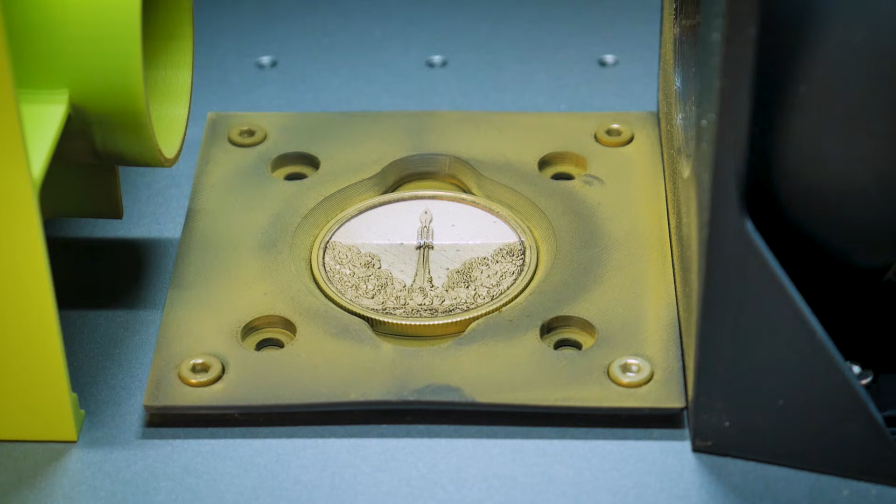And this isn't always going to be suitable for all designs, but it's just a nice tool or technique for you guys to keep in your back pocket, because I think it really looks amazing with some designs, specifically these ones here that are space themed. So in this design, we've got a rocket taking off into space in the foreground with the blackness of outer space in the background and some white billowing smoke in the foreground. And you can imagine what this image would look like if it were real, and you can imagine the darkness of space in the back, and that's what we're going to bring back in this design.

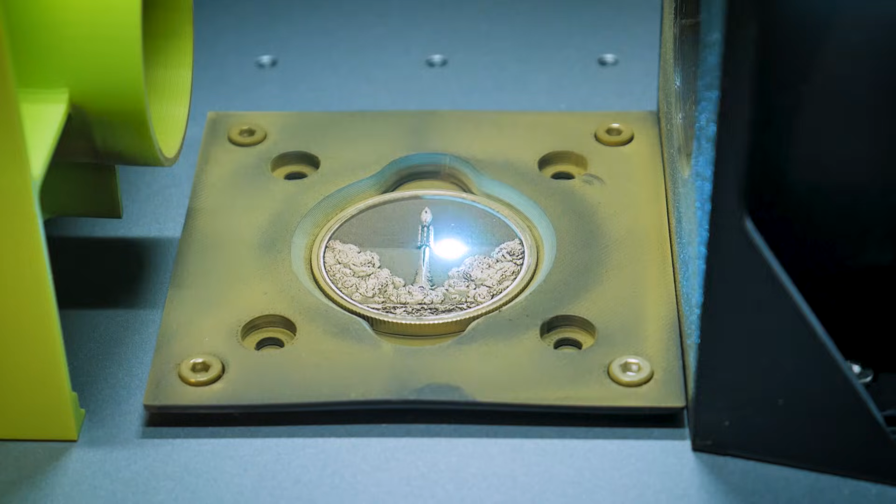And again, we've done the cleanup pass first, and then I've gone ahead and run the same blackening settings on this coin. Now we're viewing this under a pretty bright inspection light. The black outer space background is a little bit darker when you look at it under a normal light, but the key is that it is darker than the spaceship and the smoke in the foreground, and even some of the shadowy areas of that billowing smoke were made darker, and it just makes the whole thing look so much more dynamic and realistic. Had I stopped this after the cleanup pass, it would look a lot flatter and just less interesting.

On the back side of the same coin, we're going to continue on with the space theme, and I've got a spaceman standing on some sort of extraterrestrial surface, looking back at perhaps another moon or star or planet or something. The backdrop here is again the blackness of outer space, so I've gone ahead and added the blackening step to this, but I've got one more thing here that we can try and do to make that moon or planet or whatever it is pop out a little more and look more interesting.

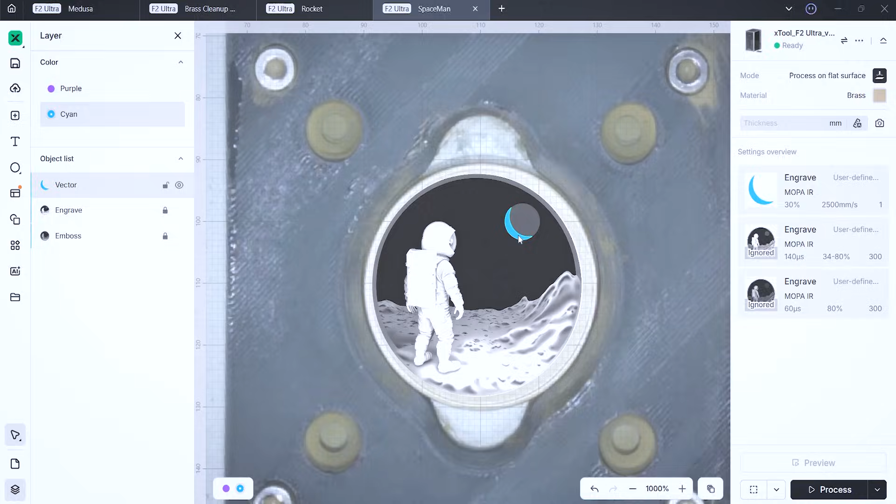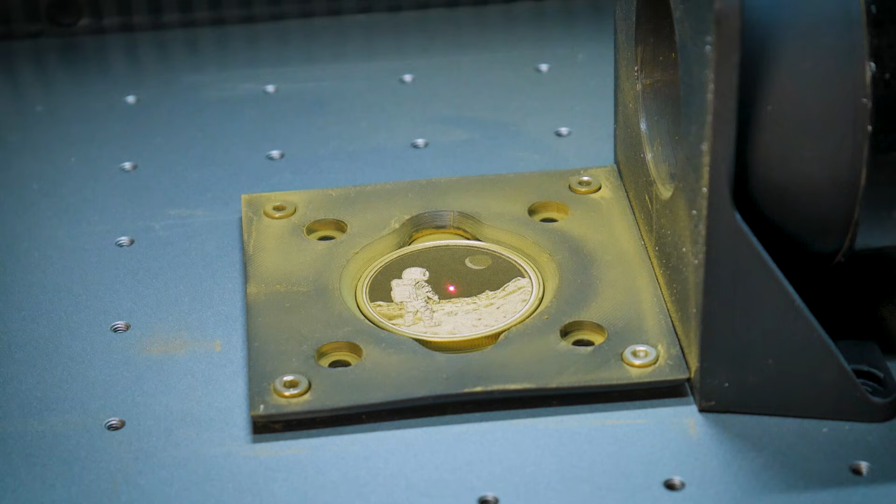So back inside of xTool Studio, I've taken a vector circle and placed it directly on top of that planet or moon, and then I've drawn a second vector circle that's larger, overlaid it on top of the first one, and then subtracted the two shapes, and that's going to leave us with this crescent shape. I've disabled the output of all of the other graphics, and that crescent shape I've assigned the brass cleanup settings. Then I'll run a few passes back on the coin, and that should brighten that crescent back up a little bit. And again, it's just going to add a very small feature in here that's going to make this image look ever so slightly more attractive.

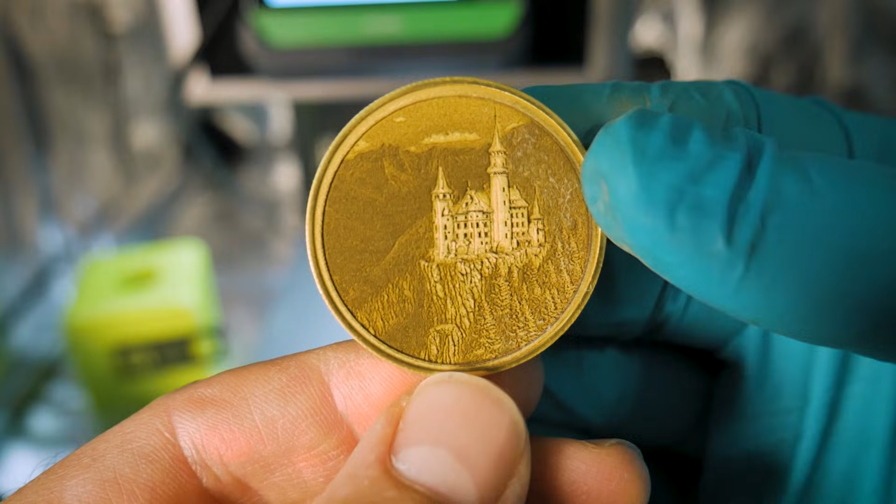And these are just small creative things that you can play around with, and there are extra creative steps that you can take to set your coins apart from other people who are just clicking the process button with the standard embossment settings. And this doesn't just apply to these brass commemorative coins, it applies to all of the projects and items that you might be engraving or embossing with the F2 Ultra or your other xTool machines and that you're trying to sell online. And that also goes for the presentation of the things that you're trying to sell, whether you're on a marketplace like Etsy or you have your own website.

The presentation of your creative work is important, and it's certainly a side topic, but on my YouTube channel, you'll find that I also do a lot of 3D printing, and I find that a 3D printer is an amazing tool for making small backdrops for photo shoots for your items, or even complementary items that go with the theme of the thing that you've engraved or embossed.